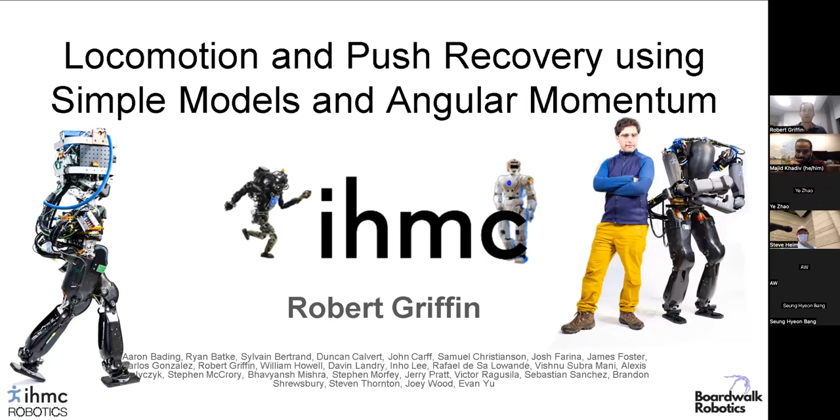So to start things off, we've been developing this robot Nadia, and I'll do one or two slides on it in a moment, but this is a video of us doing some of the different push recoveries on it, where I'm applying external disturbances. It's really exciting for me, having worked with Atlas, Valkyrie, and other robots previous to that which were not capable of doing this at all. So having a robot that's actually physically capable of push recovery has been enjoyable to work with.

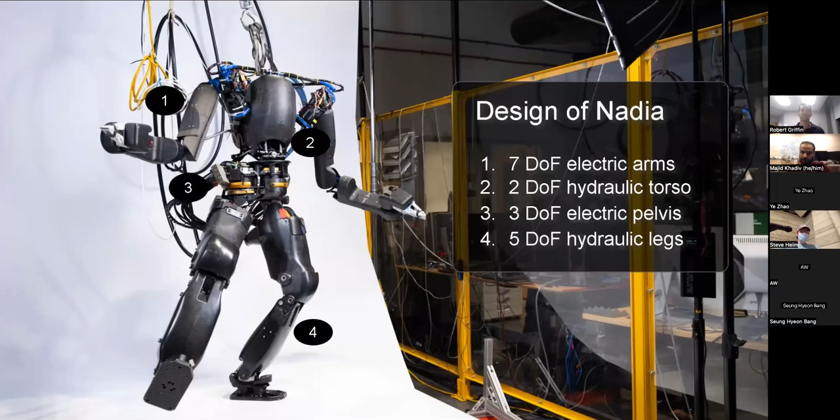Nadia is our new humanoid robot that we've developed in-house in conjunction with Boardwalk Robotics, as well as some unofficial collaborators like at IIT. It's a mix between hydraulic and electric actuators, where we have the standard 6 degree of freedom legs, with 5 of them hydraulic and 1 electric, then a 3 degree of freedom spine, and 7 degree of freedom arms.

In each of these, you can see we have these custom planetary drives that make up the pelvis and are one of the degrees of freedom of the spine. We also have commercial off-the-shelf motors, which are just T-motors for the existing version of the arms. We're hoping to improve those soon so they can be more powerful and pick up useful things. We also have these Moog integrated smart actuators powering the legs and the spine.

There are 12 of these hydraulic actuators on the robot right now. We're hoping to replace these in the near future with some of our own custom ones, simply because these came in one size.

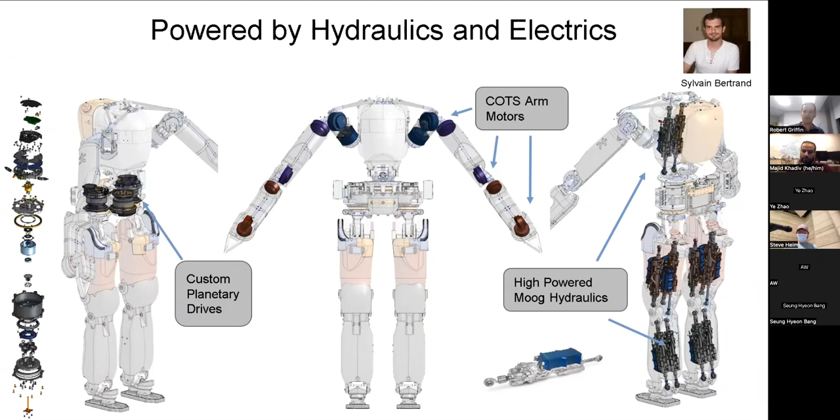We designed the robot to be made out of carbon fiber for most of it, for the shells. The idea here was a couple of things: one, so you could fully enclose all the actuation and wiring to protect the robot, so that things like springs breaking when the legs collide, like what Ye was talking about, we can avoid, but also so we can start moving towards this kind of multi-contact locomotion.

Because I think in the types of places we want to send our robots, that's what we're likely to see a lot of. A colleague of mine, Sylvain Bertrand, is there this week, and he actually gave a talk in another workshop here recently. I had a picture of him on the previous slide. If you want to ask him lots of questions about the hardware, he'll tell you that he doesn't know, but he's the person to ask.

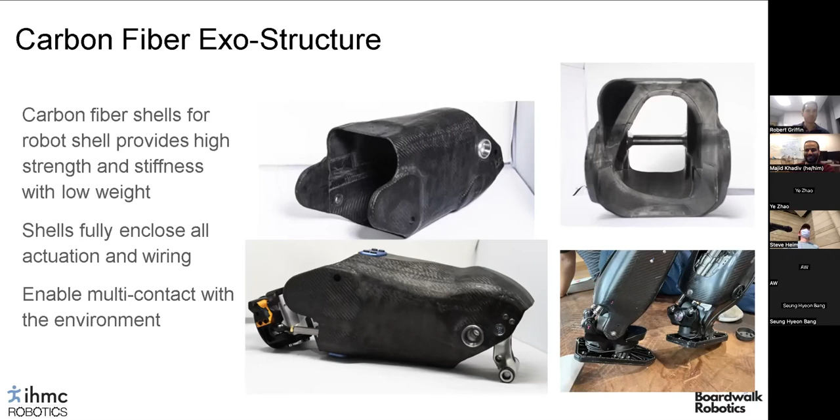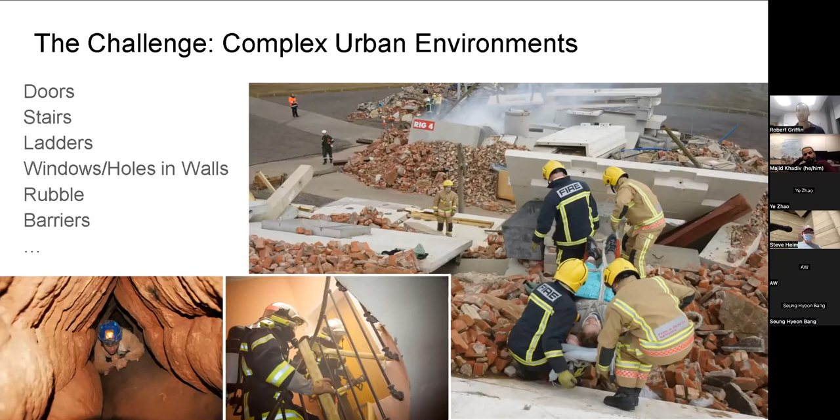The thing that frames a lot of our investigation has been this idea of developing legged robots to go through complex urban environments, whether for disaster response or firefighting. There are environments typically designed around people that we want our robots to be able to go into. So it's not simply a walk-down-the-hallway problem; it's really about performing precise locomotion while also being very robust.

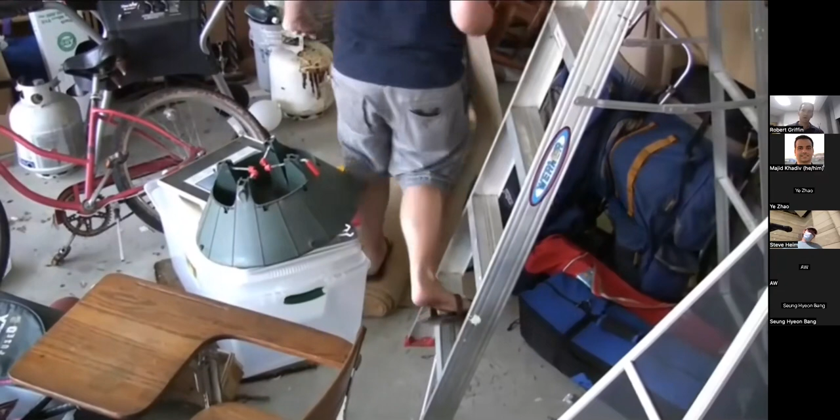You can see an example of this: here's a former colleague of mine exploring a typical disaster zone, which is a garage, where he has to squeeze between tight places, precisely put his feet on surfaces in the environment, then do things like walk over, in this case, a rug, but you could think of it as a balance beam, in order to get an object of interest, in this case, a tennis racket.

These are things that not only do we think many other forms of robots would not be capable of doing, but many other control methodologies would struggle with. This requires a very specific approach where the robot can pick these footholds and pick these contacts in order to actually accomplish this kind of locomotion.

That's driven a lot of our work in the past. Here you can see Atlas going up and down the cinder blocks. In this case, we're telling it to go to the top platform, then go to the bottom, and it's modeling the environment and then actually planning these contacts itself in order to get over there, because that's what we want these robots to be able to do: walk, move, and interact in these kind of constrained environments.

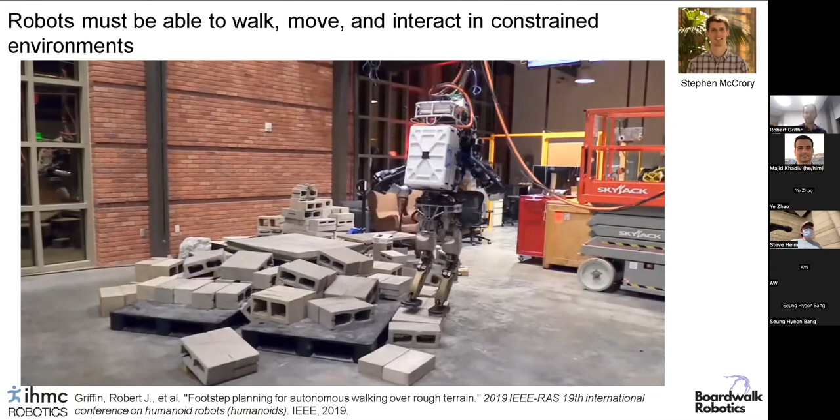We want them to be able to precisely navigate the world around them when needed. And to that end, we have these general requirements that we've put together for what we want out of a walking controller that drives a lot of the work that we do.

One is we want them to be usable in a wide variety of terrains. I know there's definitely a lot of merit to having custom controllers for custom settings, and sequential composition, like what Ye is talking about, is one of the ways to achieve that. But then you have like 80 controllers that you have to tune based on these different environments, and we're really focused on trying to get the minimal set of controllers that can go over the maximal set of terrains.

We also really want to be able to characterize what the controller is doing. If I'm debugging this robot and it did something wrong, or I'm trying to figure out what it was trying to do, I really want to be able to say what it's trying to do at any given time. Additionally, I want to be able to command it, go in and actually say, well, you were doing this, but I actually want you to do this, and provide those kind of inputs to the robot and have it execute in real time.

This is actually one of the reasons that we've historically avoided model predictive control and reinforcement learning: it's often fairly challenging to gain intuition as to what the output of these controllers are doing, or how to easily change what they're doing, because it's solving some potentially wild cost function, and if you add a cost or a constraint, it could have far-reaching ramifications further down the line.

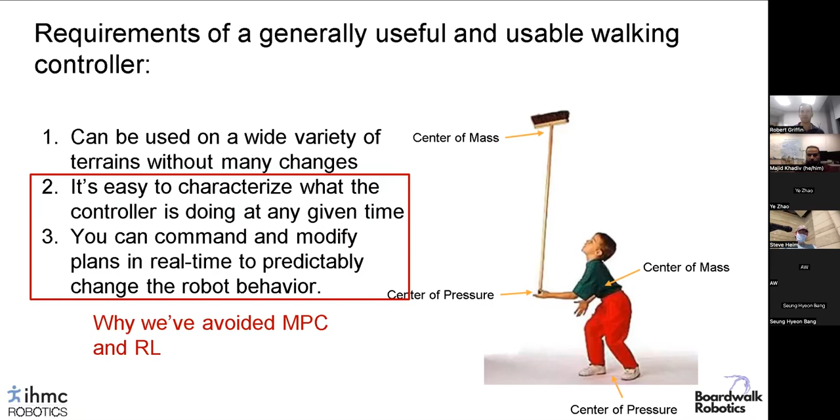That's not to say that those methods aren't worth investigating. I definitely think that's the future, but that's been why we've stuck with the approach we're using, which is mainly to do reduced order models.

If I think about walking as just a simple inverted pendulum, that covers a lot of things. I can code a lot of locomotion based on these points. So here you can just see the standard center of pressure, centroidal moment pivot point, which are driving this divergent component of motion, or capture point.

And you can also see it's just linear, and you can get a really good vertical plot of everything that's going on, and you can understand exactly what the robot's doing. You can also use these to recursively calculate a trajectory based on a desired set of footholds, and then execute this online.

This is exactly what we were doing with Atlas and the other videos. We've applied it to Nadia, and it starts to work pretty well. It's not quite as dynamic as what we would like.

I think that particularly as you start trying to shorten the double support phase, which is a big difference between a lot of these classical humanoid ZMP style walking locomotion and dynamic natural locomotion, is that ZMP has a long double support phase, natural walking does not.

We start to run into problems using these classical approaches, but we think that it does look pretty good, and the robot can move pretty quickly in a lot of different directions. It's also extendable to these kind of multi-contact scenarios.

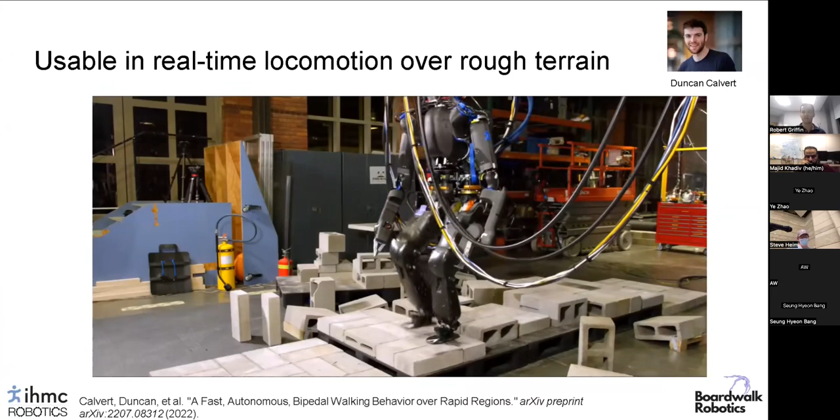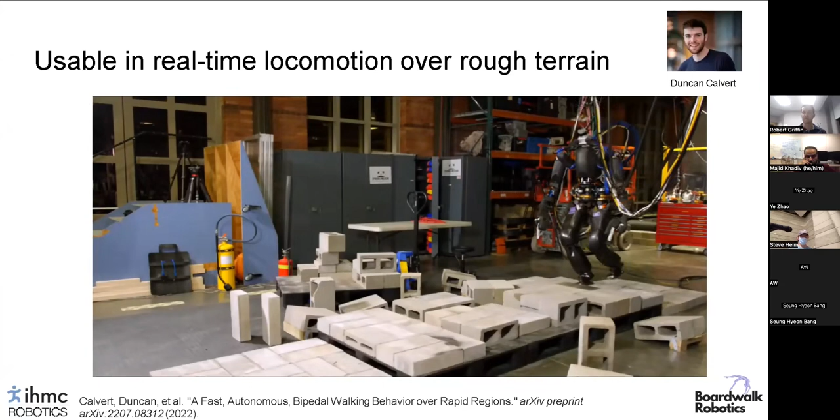But this doesn't really talk about any kind of robustness. From here, I've mainly just said, well, if you have a set of footholds, how you would track them and plan to achieve them. As you can see at the end of this, occasionally it will mess up, and you need to do things like foothold adjustment.

To that end, we've continued to use capture regions. If you're not familiar with capture regions, it's basically just the set of points at which you can put your foot in order to come to a stop, if you're talking about the one-step capture region.

So here you can see that on the left, if I'm just thinking about a really basic line, as the dynamics evolve, you can see where the center of mass ends up. And then you can extend this easily into 2 dimensions, into this kind of convex state.

You can also look at expanding this to multi-step capture regions. So, if I don't necessarily want to come to a stop in a single step, but I know that it will kind of decay towards this capturability.

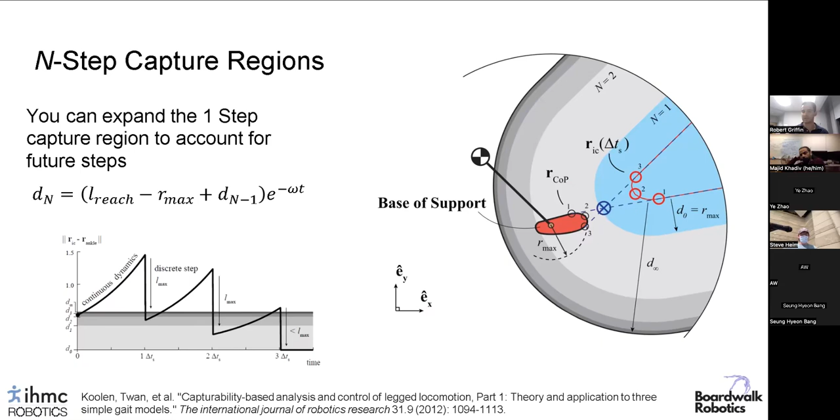One of the big issues that we've seen, and I think Ye touched on this a little bit in his talk recently, was this doesn't actually take into account crossover steps at all, or the fact that in reality, the base of support, you can't just arbitrarily step. You have this area where you can't put your foot. In this case, I've indicated it by the red area.

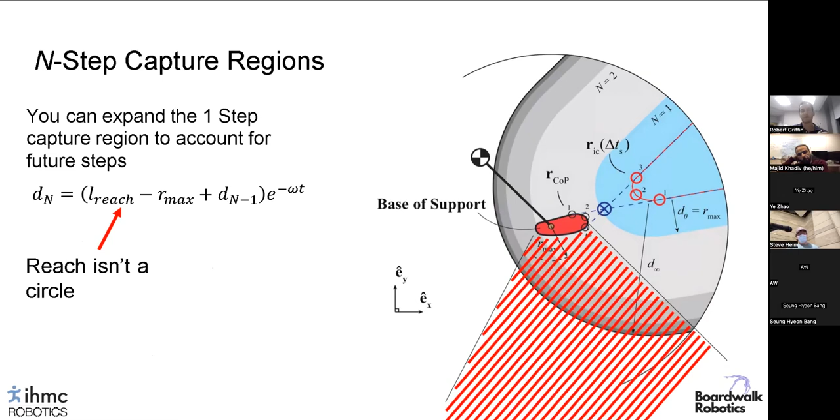So adding that to the area in which the robot can reach, if I add that to the reachable set of the robot, I can then expand it pretty considerably.

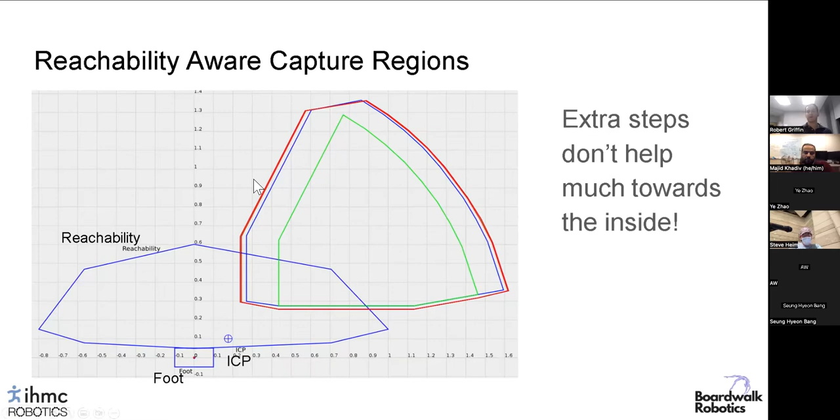But just applying this as is, one of the things we noticed is that you have to be very particular about it. So it works, but you have to be very particular about when you push the robot if you want to make a good video like this. Otherwise, it just falls over.

And I think part of that, if you think about it, is again because of this transfer duration. So I can tell the robot, if you're under a disturbance, step more quickly. But one of the things you really want to do is realize that if you have this long transfer duration, it's effectively the same thing as having a much slower swing. So you can see here that vastly reduces the amount of capturability that I actually have.

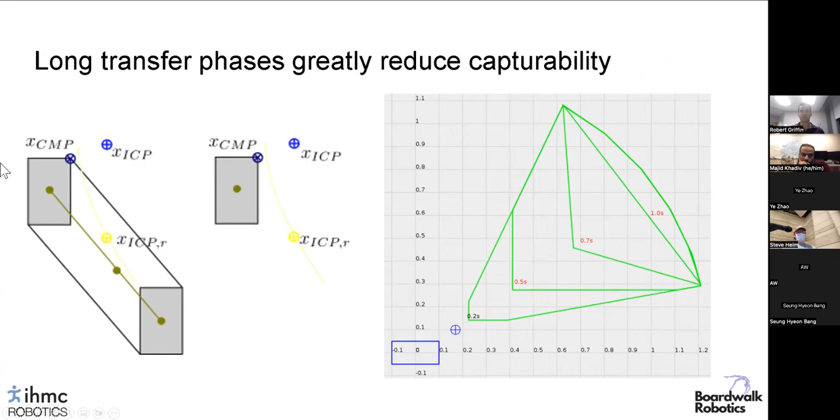So instead, by basically treating the capture point as a phase variable, you can compute what the current duration through transfer should be in order to minimize this amount of feedback. So if I have my capture point near the back of the trailing foot, I'm basically at the start of transfer. Or if it's near the front of the foot that's about to be my support foot, I'm basically at the end of transfer and I might as well initialize the next step.

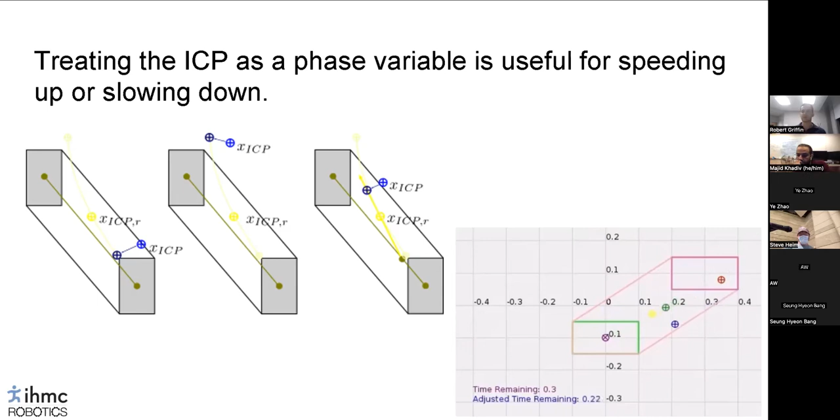So you can actually do this to compute that swing speed up. And that's one of the big things we did in order to get this robot to step much more robustly: give it the ability to more or less skip the transfer step. If you look at the video previously at the beginning, you can push the robot pretty much whenever. Here's a good example, and it will skip the transfer phase as needed.

But one of the things we typically see on robots is that you're walking in full support... those didn't export as videos. They're walking in full support, whereas humans don't really need this kind of full support area.

So here would be a video of these people walking over rocks, where you can kind of see there's pretty much always just points of contact. It's not like they're always having this kind of full foothold, which you typically see in a robot.

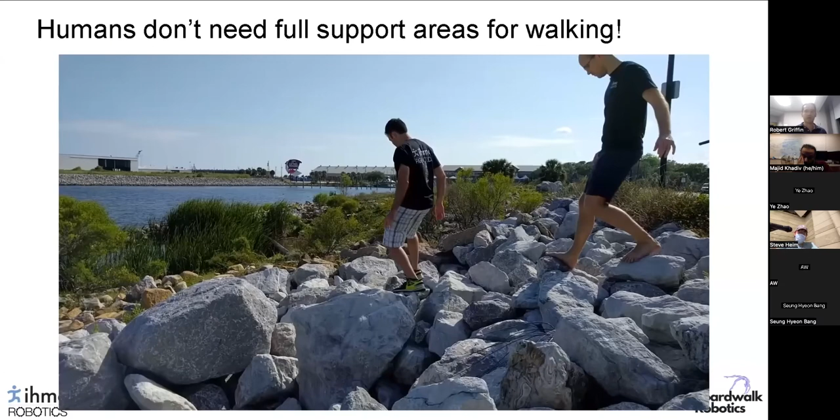You can actually imagine this gibbon or a tightrope walker walking where they have this big long balance beam that they're able to hold. They're pretty much just using that kind of angular momentum to regulate those interactions.

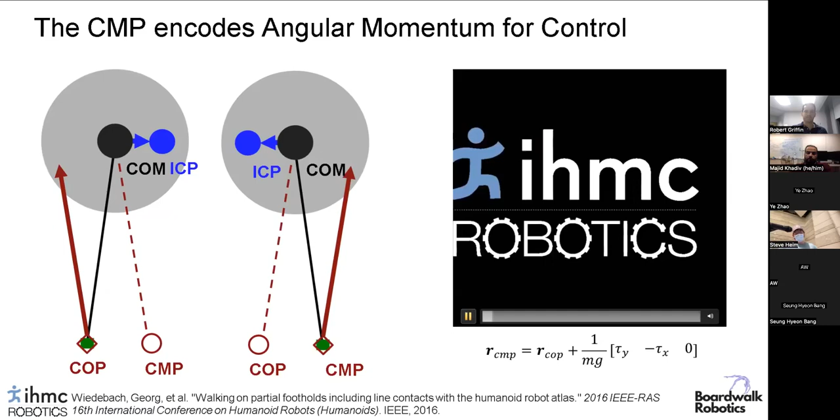We can actually go back to the simple models again to understand this more fully. Here's an example with Atlas. All we're doing is we've told the robot, you're standing on a line, and we're allowing the CMP to leave the foot, which is the same thing as the robot getting the force vector not pointing through the center of mass anymore, so generating significant angular momentum.

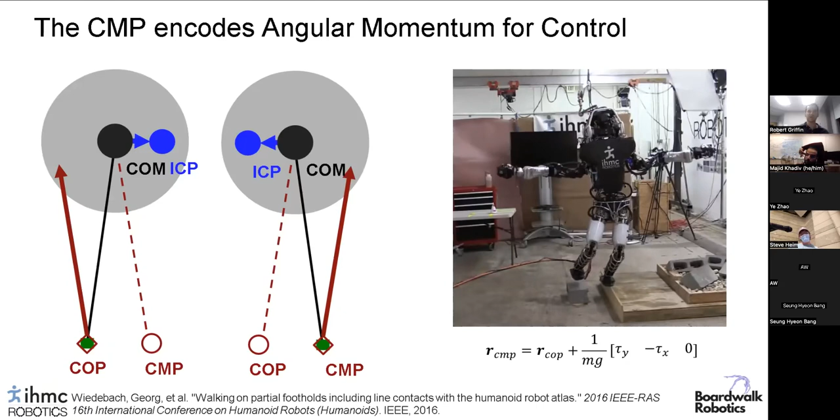You can see how this directly relates to the torque about the center of mass. So it's really just using that angular momentum for the control of the robot.

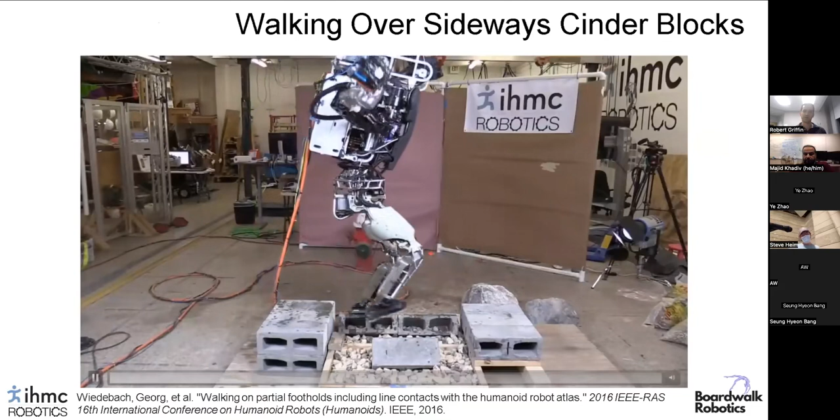We can apply this to the platform, walking over these angled cinder blocks where the robot is able to infer what the ground contact conditions are, and then it can actually walk across these cinder blocks. This is from a handful of years ago.

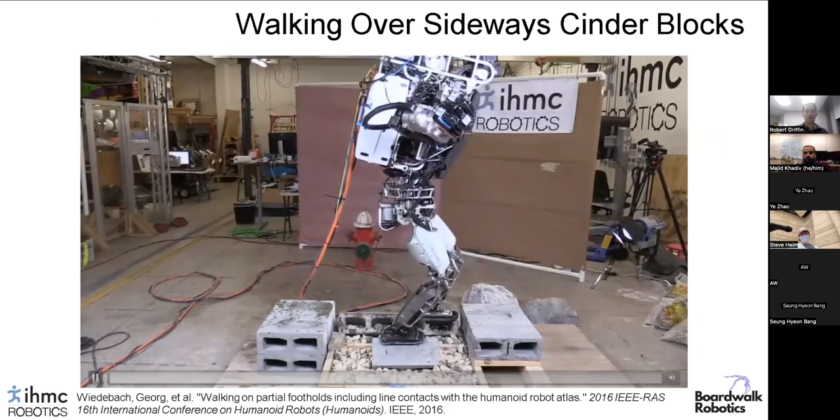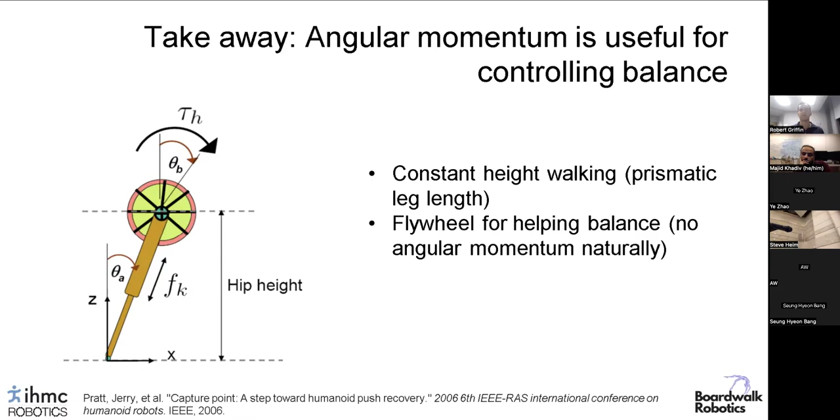One of the big takeaways is that angular momentum is useful for controlling balance. We've thought about this a lot with this kind of angular momentum, or the linear inverted pendulum model with a flywheel. One of the underlying assumptions of this is that we don't have any angular momentum occurring naturally - all of it is this kind of feedback control that you're doing.

But even if you're not talking about these dynamic motions that Ye was showing, where mini cheetahs are jumping, once you start having non-massless legs, where on Nadia we have very heavy legs of the robot, the center of mass is actually around the center of the hip pitch - below the pelvis. You have considerable angular momentum just walking.

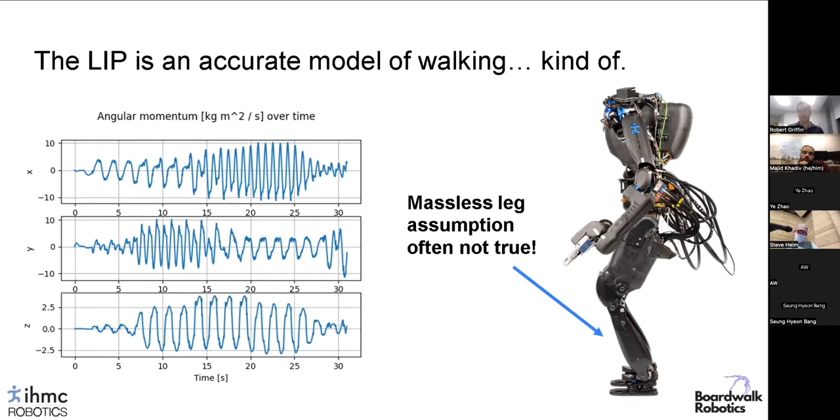To address this, one of the things we started exploring was the use of this three potato model, which is a pretty basic idea. It's been used before, where you just have this center of mass position as your main potato, and then you have a potato for each foot - they're just these point masses or particle masses. You can then compute from walking what this required angular momentum is.

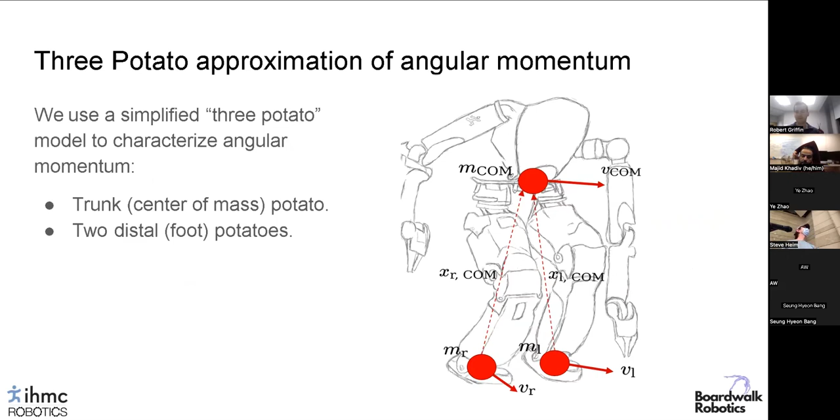This isn't quite to the same extent as using this dynamic idea of having full inverse kinematics or a full body model for model predictive control, but it is kind of towards that, where you have your trajectories and you're able to plan using these simplified models.

This prediction value isn't really as accurate as we'd like it to be. So to address that, you can actually introduce machine learning, which is great - I'm happy that we can actually use it somewhere in our stack.

In this case, what we're doing is actually learning residual models. So we still have our entire reference value from the three potato model, and we're learning the residual values to try and drive that three potato model towards the actual whole body angular momentum model that you can calculate in real time.

Training this doesn't take very much time - it only takes about 2 minutes, and then you can run it, infer on it, obviously in real time. And using it, it looks fantastic.

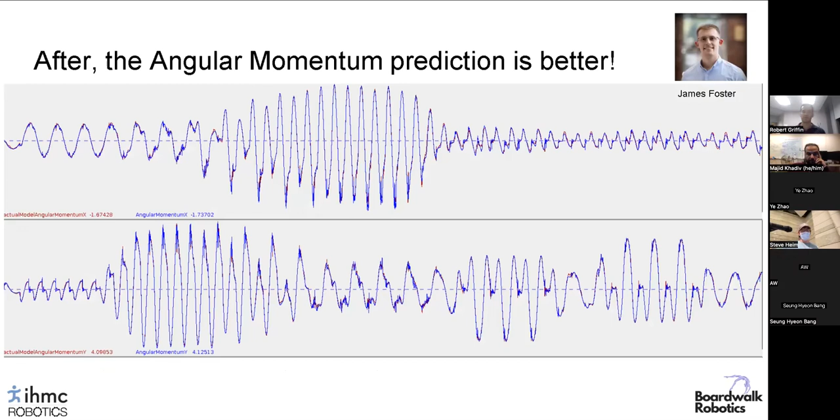You can then use these angular momentum trajectories to directly calculate a modified capture point trajectory, which, if you're interested in that, I'd refer you to a lot of work done previously by colleagues like Johannes Englsberger. It works pretty well on hardware. We think that it's going to enable us to do more dynamic locomotion.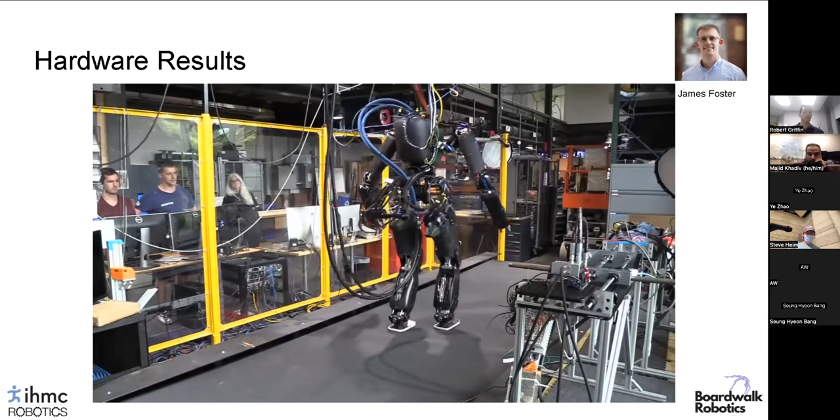We haven't yet fully been able to investigate that, but that's one of the areas we're looking at going. However, none of this looks very natural.

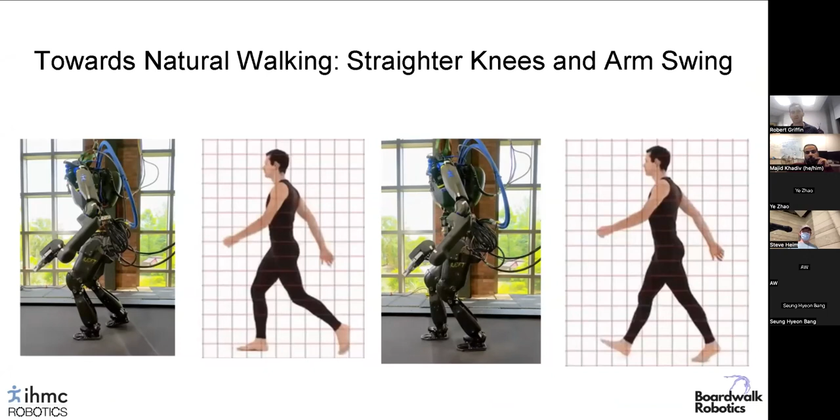While encoding arm swing as a heuristic, where you just say swing the arms while it walks, is an option, we're looking to come up with a more model-based approach. And to that end, this is actually, I appreciate the plug again by Ye.

So we worked on trying to think about this: what is the angular analog to a center of mass? He talked about having this angular excursion value where you're integrating forward in time what the angular momentum of the system is to try and compute that value, but that's going to drift because it is this non-integrable function intrinsically, since it's a non-holonomic system.

You can say that things like arm swing emerge from centroidal angular momentum, but if you're just relying on that, that's a velocity control, not a position control. So we're trying to figure out a way of actually coming up with this angular center of mass.

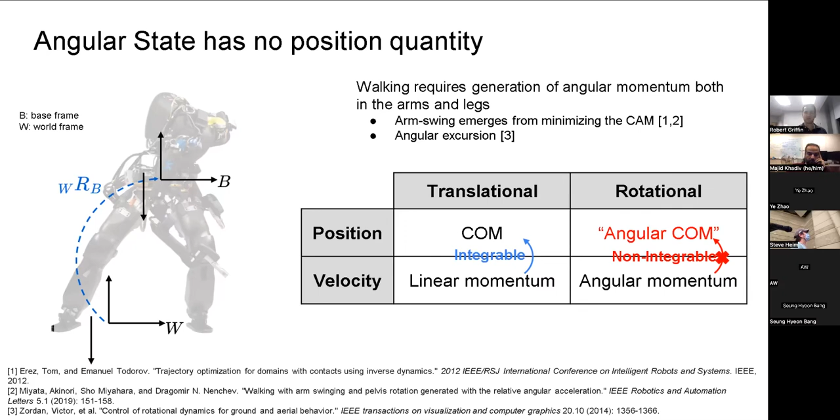One of the reasons we want to do that is because you can't really use just velocity control for angular momentum, since it's going to drift, and it's not a very smooth signal when you think about it in a real feedback control setting. But you need to have some concept of it.

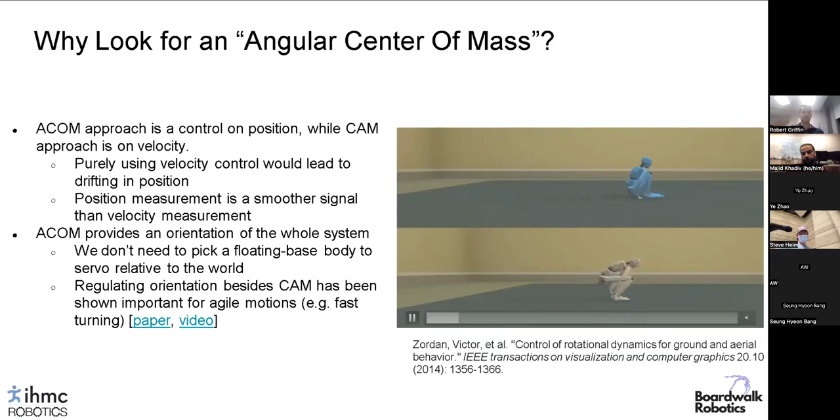If you look at some of these videos that have been generated previously of these really dynamic motions, this concept of having an angular momentum or angular positional state is kind of baked into having stable solutions that can be achieved.

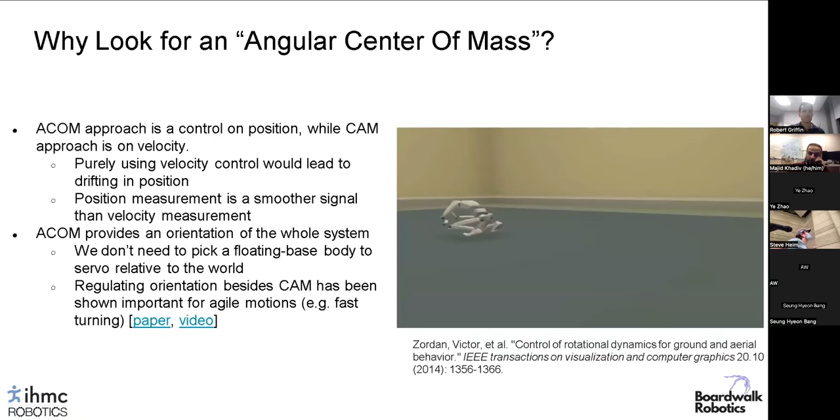So to that end, this work was done by a colleague, Yu-Ming Chen, who's a PhD student with Michael Posa over at UPenn.

We looked at this way of actually encoding the orientation of the robot. We basically said that we wanted to have some rotation from the base, which is typically the pelvis, to this angular center of mass, that then minimizes the angular velocity of the system.

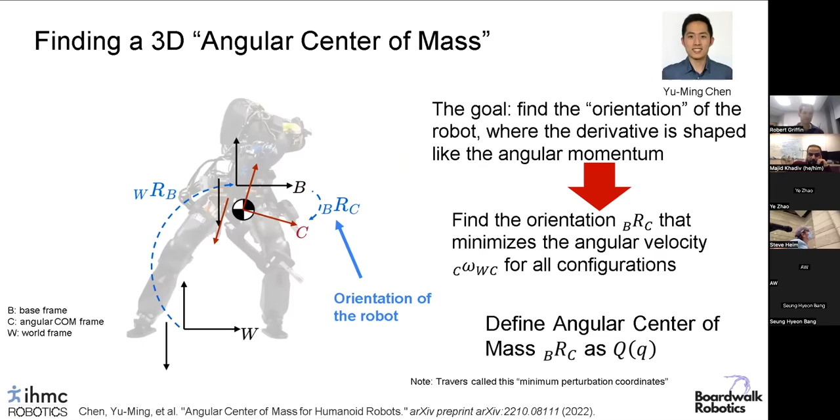We can then just define it as a quaternion, and you can compute the angular momentum of the system pretty standard.

Where you have your rotation at this angular center of mass, then you have the angular velocity of the base in the world, and then you have the angular velocity of the angular center of mass relative to the base. If you decompose this, you can see that the rotation is a function of whatever your orientation is, and then you have Jacobians that are a function of position, and then it's just a linear function of the joint velocity.

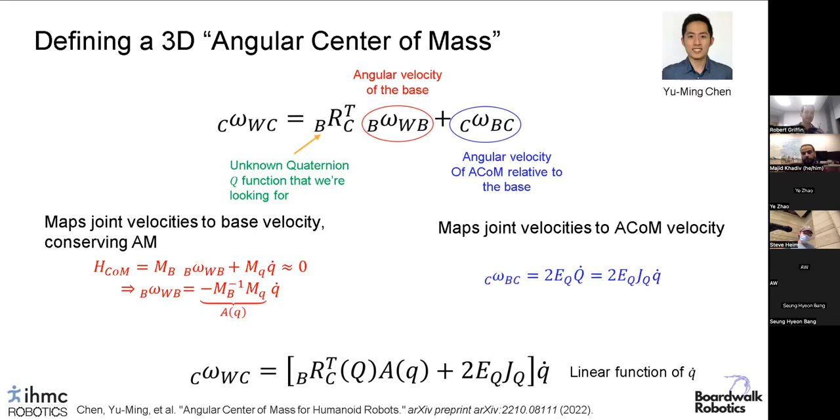So the idea is to actually fit this rotation matrix to basis vectors. We can set up an optimization where you randomly sample the configurations of the robot, and define some function for this rotational center of mass to get your quaternion that minimizes this system, using an optimization to drive the derivative to look like angular momentum.

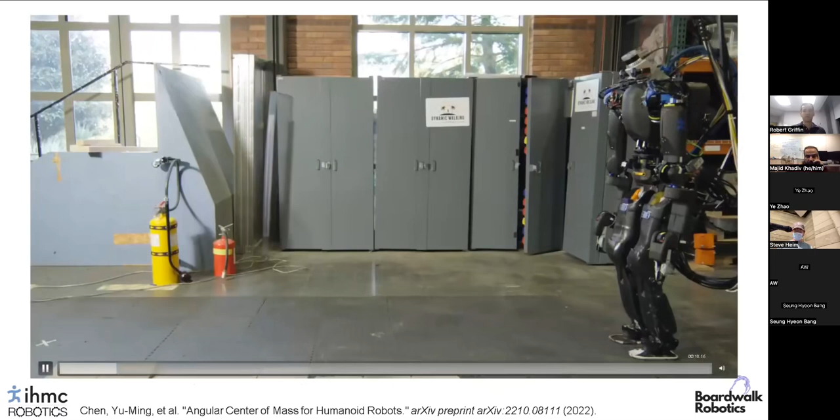This again also converges in about 2 minutes, and gives you this angular center of mass state. When you apply this on the robot, you can get pretty good walking. You can see here the robot standing in an upright fashion with the legs pretty straight, and we're getting this arm swing just kind of emerging naturally.

One issue is that it's not quite as smooth as we would like, but I think that partly has to do with the shape of the underlying trajectories when it comes to things like the swing leg, where we don't have a really great angular momentum profile there.

But we think there's a lot of other ways you can apply this, because you now have some angular state variable, and you can use it for constraints so the robot can naturally adjust its posture during manipulation tasks, or crouching, or just feedback control, so that you reduce the number of feedback controllers you typically pass into a whole body control module, and just have your natural posture function of the robot that you're going towards.

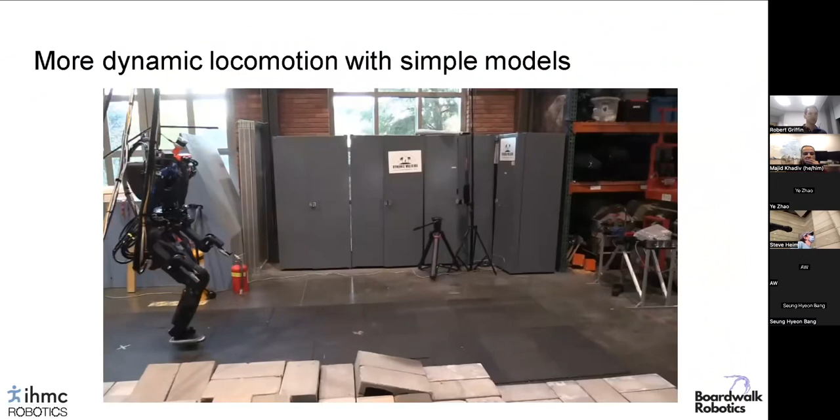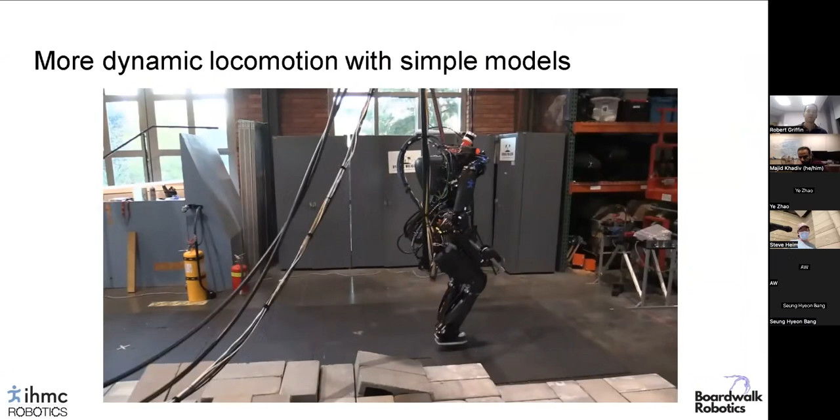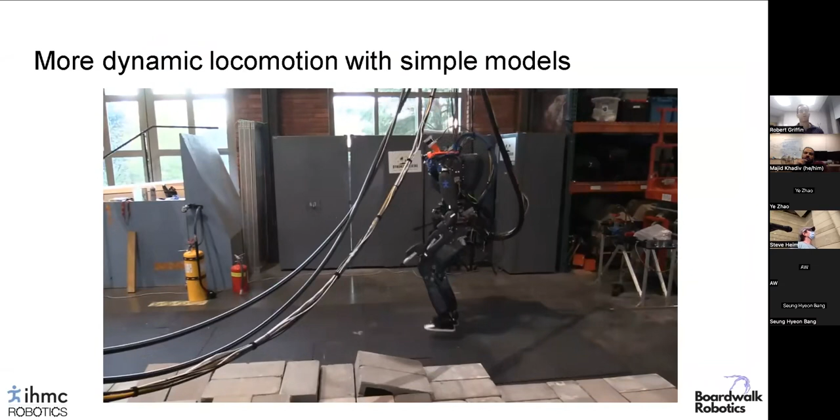We haven't made much progress on this yet, but we're looking at trying to go into more dynamic locomotion, specifically looking at angular momentum, using simple models on Nadia, because now we have a robot capable of doing it, which is pretty exciting. This is kind of thinking about using the concept of the angular momentum linear inverted pendulum introduced by Yukai Gong in the last few years, where it's encoding the linear and angular momentum into a single state, then using that to calculate where to step. So that's one of the elements going into this.

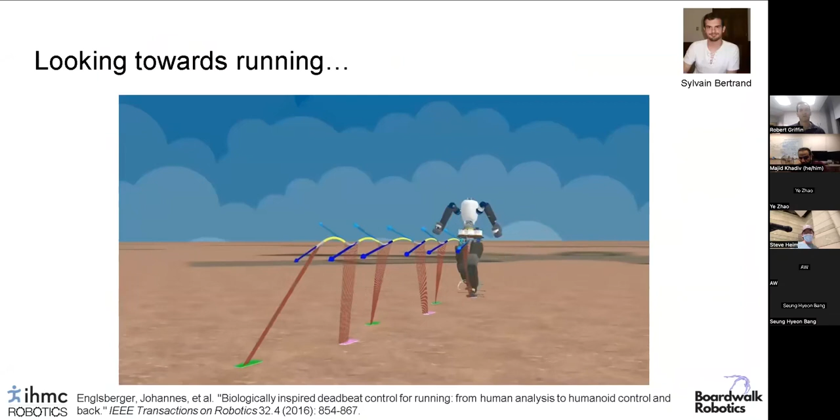We're also looking towards running. If you want to talk more with Sylvain about this, I'd recommend doing so. We're interested in having Nadia run here in the near future, building off some work by Johannes.

We've had a lot of different performers on this project, as well as thanking our funding sources of NASA, ONR, and the DARPA. And I can't forget our partners at IIT, Halodi, and Moog. This all takes a huge team to build the hardware, write the software, and do all the algorithms, so much thanks to all of them.

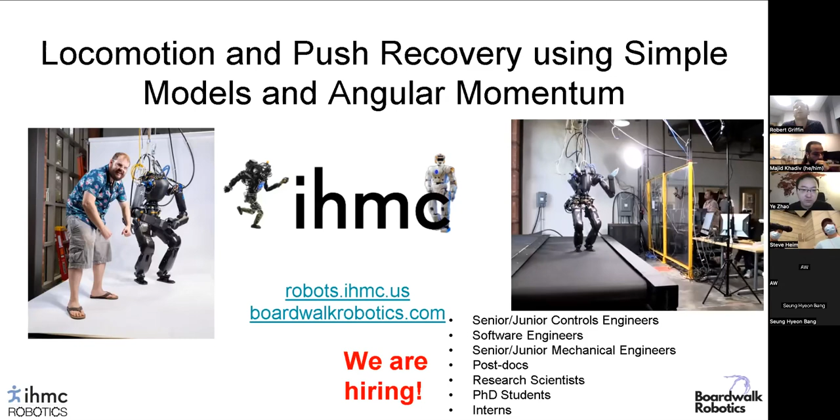I think you would get a lot of similar properties from that angular excursion if you were to initialize it at the correct value. But it's the fact that it's so dependent upon where you initialize it, and then when you reinitialize it, that I think is the nice thing this angular center of mass avoids, because it's a positional function.

I see, so it's okay, I see. Okay, yeah, and I mean, this angular excursion is sort of more path dependent, right? Like you might get different answers if you start from different initial positions or configurations where you start to integrate things.